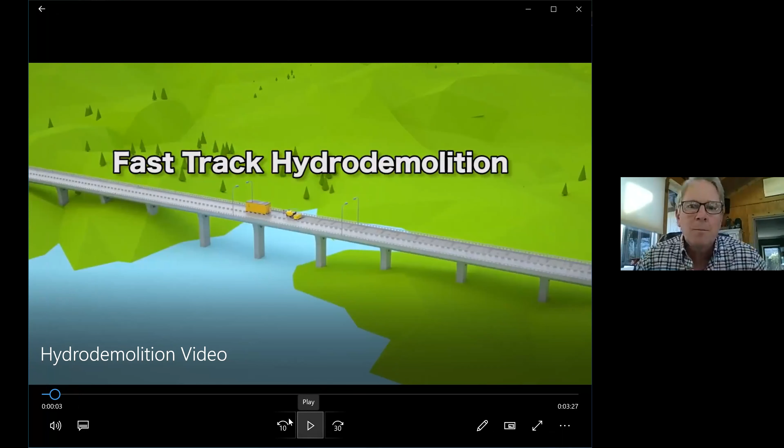Fast track hydrodemolition is a method used to prepare bridge decks for new latex modified concrete overlays. A bridge deck can be prepared quickly, cost effectively, and the high strength bond achieved between the existing deck and the new LMC overlay will assure a 25-year repair.

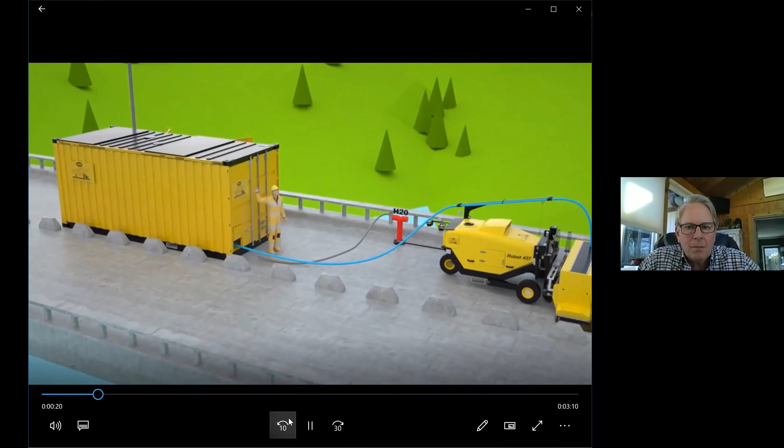On a typical bridge deck work site, you'll see a hydrodemolition pump unit where the water is pressurized and flow rates are controlled, and a hydrodemolition robot where a powerful water jet is controlled and safely operated. A potable water source from a water tanker or directly from a hydrant is attached to the pump unit.

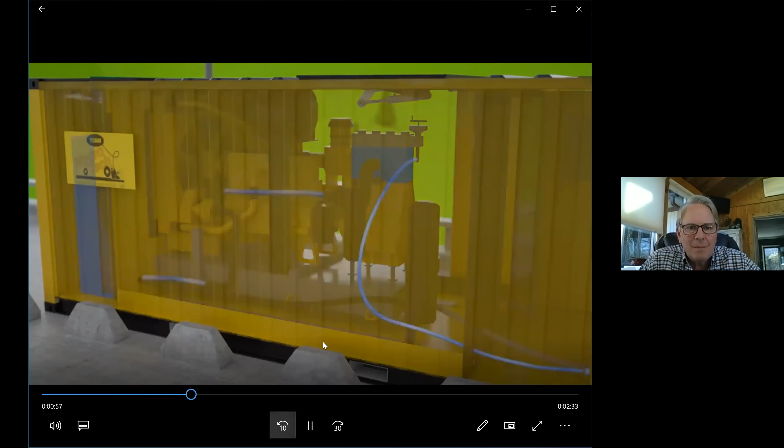Inside the pump unit, the water is pressurized between 13,000 and 20,000 psi, the ideal pressure range for selective removal, where deteriorated concrete is selectively removed from the structural deck slab without disturbing the sound concrete remaining. The pressurized water is then delivered through high-pressure hoses to the hydrodemolition robot, where the water jet releases from the nozzle and impacts the bridge deck surface.

The lateral movements of the water jet and the forward movements of the robot are computer-controlled. Inside the cutting head, the water jet oscillates back and forth and impacts the concrete deck, causing no impact vibration or micro-cracking. The precise mechanical movements of the hydrodemolition robot ensure that every square foot of the concrete surface receives exactly the same water jet energy exposure time.

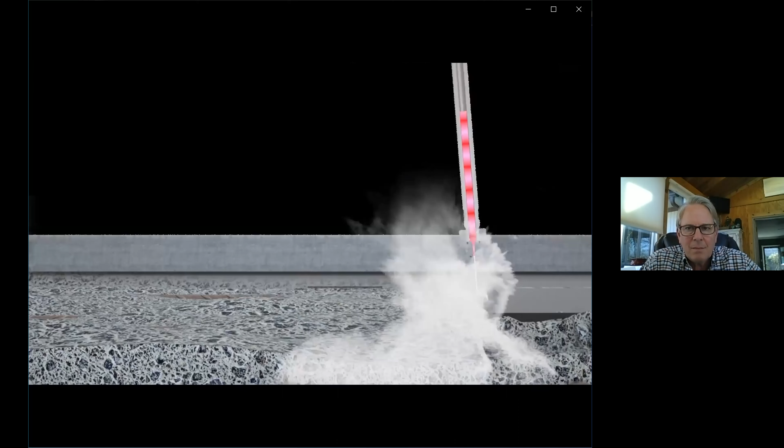The water jet is calibrated for lateral movements, forward movements, pressure and flow rate to achieve selective removal of all bad concrete in the deck, while leaving a bondable surface for the new LMC overlay, all during one pass of the robot. The water jet attacks cracks and pores in the deck surface and essentially washes away weakened concrete.

With fast-track hydrodemolition, you're not removing concrete for depth, you're using it only to selectively remove deteriorated concrete while leaving a rough and bondable surface.

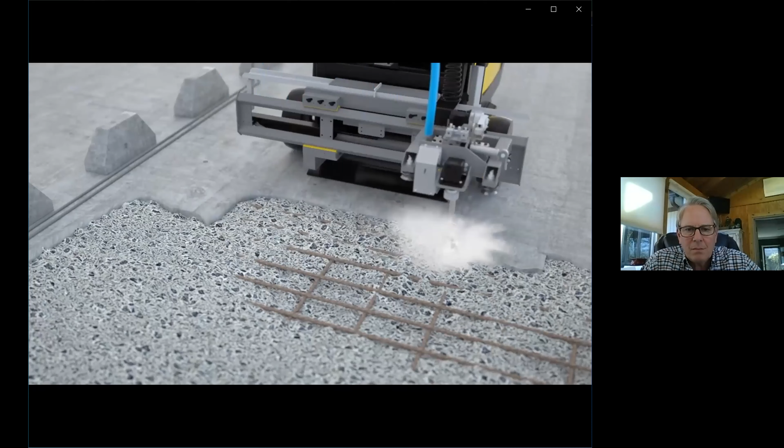Hydrodemolition replaces the need for jackhammering to remove deteriorated concrete from bridge decks. Jackhammers cause damage to the existing deck slab and to existing rebars in the deck. This will affect the bond interface of a new overlay and will greatly reduce the service life of the overlay.

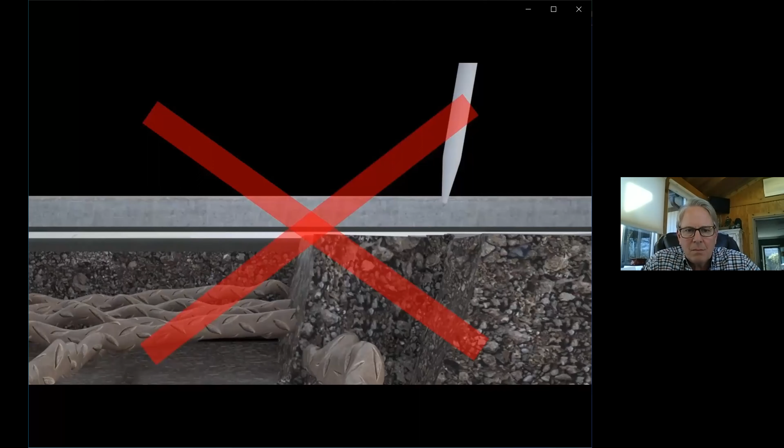With hydrodemolition, there are no fractures left behind, plus a great bond and selective removal of deteriorated concrete is achieved in 75% less time. Modern hydrodemolition equipment is remote controlled, highly productive, and extremely precise.

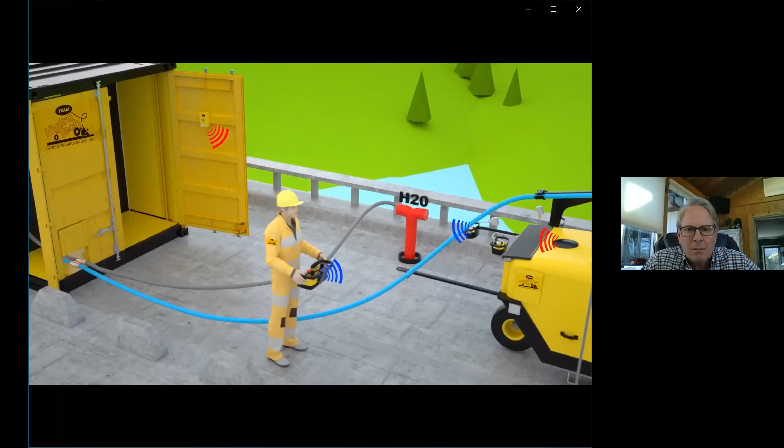Safety is our number one concern. The pumps can be shut down from numerous locations throughout the system.

Fast-track hydrodemolition continues to be the preferred choice to prepare a bridge deck for a new LMC concrete overlay. An entire bridge deck can be prepared in just one day. With a new LMC overlay, the bridge deck will last for 25 years of maintenance-free service life.

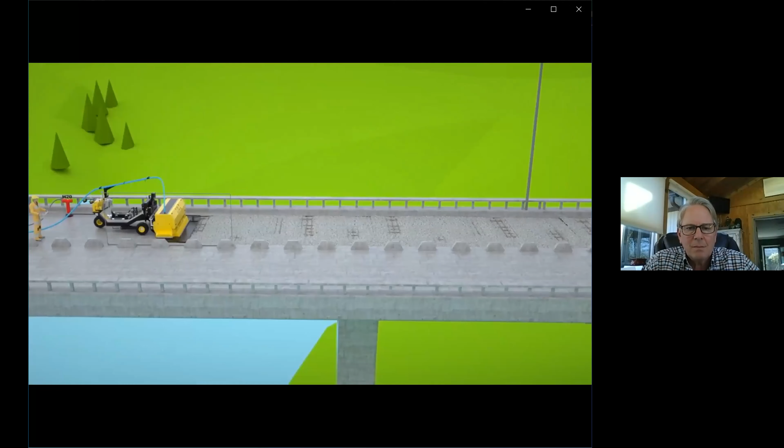There is no proven method better than the fast-track hydrodemolition, combined with a latex-modified concrete overlay, to repair bridge decks long-term. Please contact us for additional information and to discuss your bridge deck repair needs.

Okay, well, that gave you a good animated idea of how our hydrodemolition equipment works and attacks the bridge decks and selectively removes the bad concrete.

Now I'm going to go through and explain it through a PowerPoint and a lot of pictures. I like showing a lot of pictures when I present. I'm also going to mix in some of the really neat jobs we did over the last two years and talk a little bit about the Midwest and the work we've done in Oklahoma. I'll follow it up with maybe a short discussion on the concrete we use, and then include some of the research projects we've been involved with that have involved hydrodemolition or concrete overlays. So with that, I'm going to share my screen again and get started with my PowerPoint presentation.

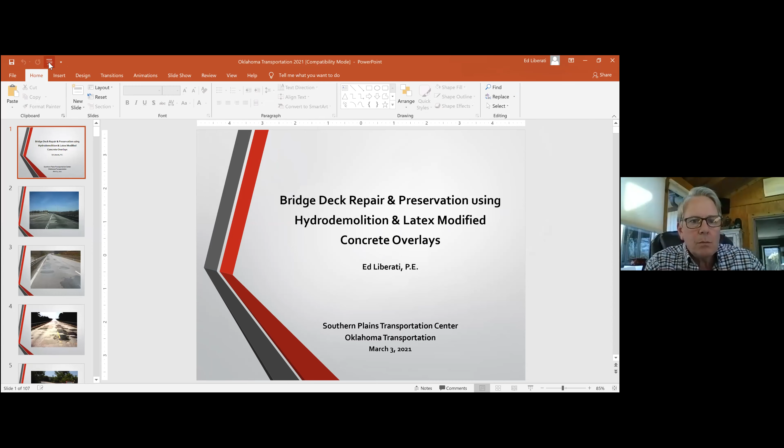There we go. All right, this is what happens to bridge decks 10, 20 years after.

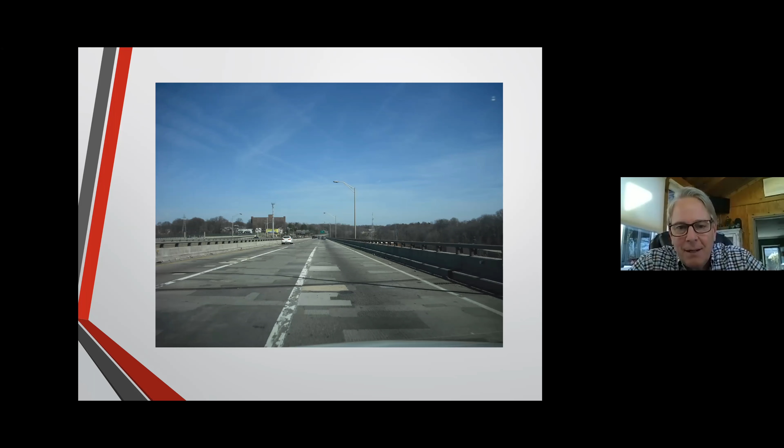In the Midwest, we use a lot of salt. We have heavy truck traffic now, freeze thaws. It causes the concrete to crack, and then the water gets in these cracks and it freezes and contracts and expands and causes potholes. And then the chlorides from the salt get into the steel, that causes rust to build up around the steel, and it also causes that to expand, and it causes pop outs also.

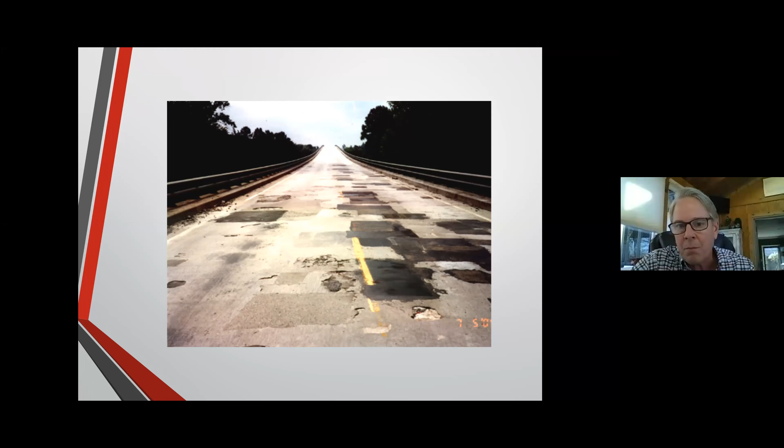So as you can see, bridge decks are built from the bottom up, but from the top down is kind of how they deteriorate. These are all bridges that, if they went much longer, you might have had to replace the whole bridge. But what we're in the business of is preserving bridge decks.

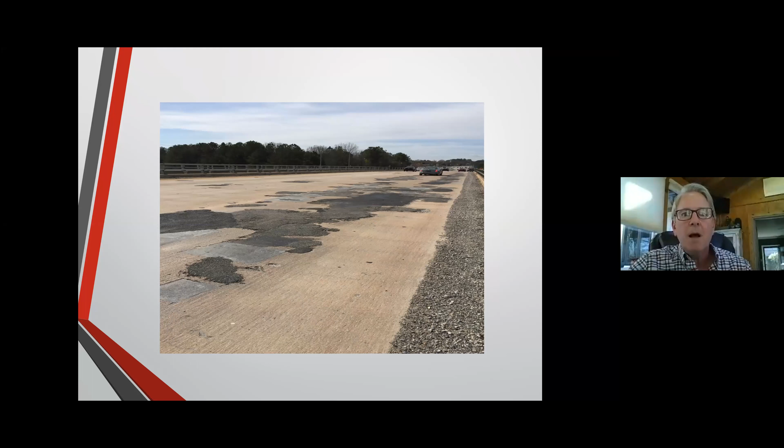There's one over in South Carolina we fixed. Bridge deck preservation, that's something that Walt said earlier that I presented at earlier this month, and it's what we all do. It's very cost effective to preserve bridges and fix them and make them last longer than it is to just build a bridge, let it go 25 years, and then have to build another bridge.

So our bridge preservation partnership really focuses on preservation of bridges, and that's exactly what we do. As a company, we prepare bridge decks and then install new concrete overlays on them. We've been doing this for almost 60 years now, so it's nothing new, but there's a lot more products out there and a lot more approaches to it.

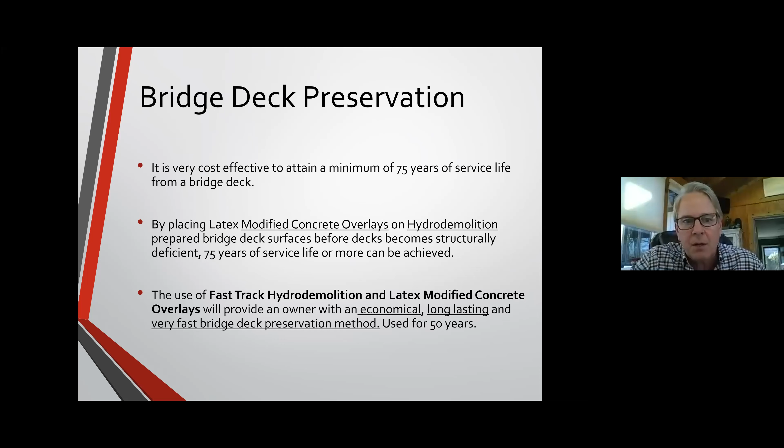But when bridges get into the condition of the slides I just shown, that's when you really need to get the hydrodemolition robots out there and the concrete overlays.

A couple of the strategies I've been involved with: when I was born in the 60s, there was a lot of interstate being built. In the 80s, that's when I was a young engineer. The first job I was ever on, they were doing a concrete overlay.

The bridge was about 20 years old when they put a latex overlay on it. That was the first time I ever saw hydrodemolition. I was 18 years old. Well, 25 years later, about 10 years ago, they put a second overlay on that bridge. So the bridge was built in the 60s, overlaid the first time in the 80s, and now it's been overlaid again in the 2000s.

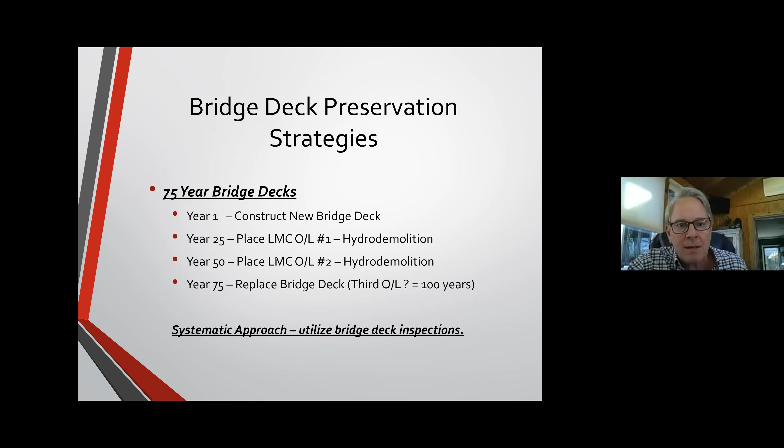Instead of replacing this whole bridge, we're preserving it. It's a systematic approach utilized by bridge inspection reports. You've got to get to these bridges at the right time and repair them. Otherwise they get too far along in deterioration and you have to replace them, which takes a lot of time and a lot of money.

So now I'm going to be talking all about hydrodemolition for the next half hour. It's a mechanical process, like you saw - it's all equipment that does the work. It replaces jackhammers. With that water jet, rapid erosion occurs. The jet attacks the cement matrix, pores, and cracks in the concrete - it doesn't cut the stone. It gets into these areas and blows them out, and that's how we can selectively remove the concrete.

We get out on every deck and calibrate these robots - the movements, the pressure, the flow rate through the machine, and the water jet exposure time. Once it's calibrated properly, we run it at those settings over the whole bridge, and what we achieve is selective removal.

The equipment, as you saw in the video, consists of the pump unit, the power unit, a hydrodemolition robot, and you did not see a vac truck, but you'll see how we clean up all the debris that's left on the deck.

We easily mobilize it to any project. We worked in 24 states last year, and the setup time's easy - we get on a job in an hour and we can be cutting.

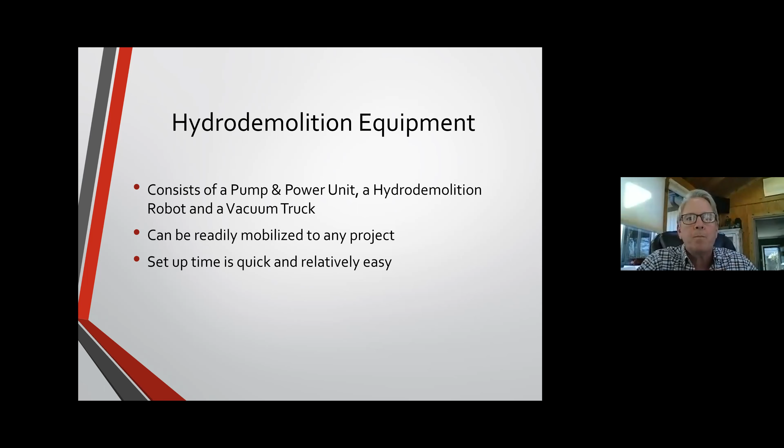The pump unit was the first one. As you saw, it received water from the water tankers or from a hydrant. It's the big power pack that filters and pressurizes the water, and supplies it to the units at 12,000 to 20,000 PSI, at a flow rate of about 55 gallons a minute, sometimes going up to 80 gallons a minute. It's called the selective settings, so that you get selective removal.

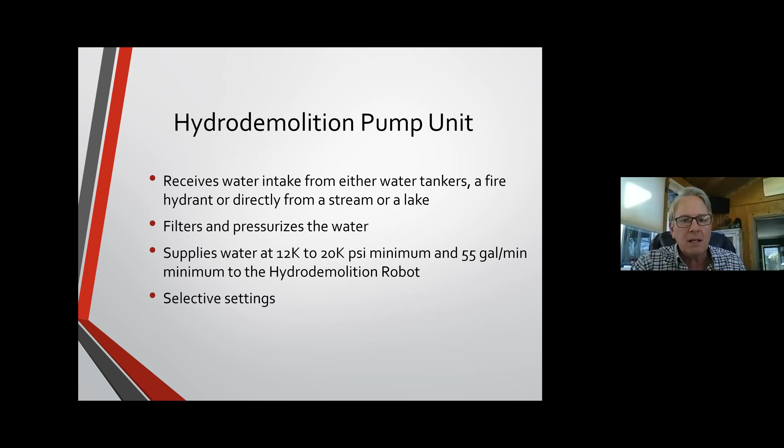On the video, it just showed a box. Well, we have to be able to get around, so we have that box up on a semi-truck, and that's how you drive it around. There's a water tanker supplying it.

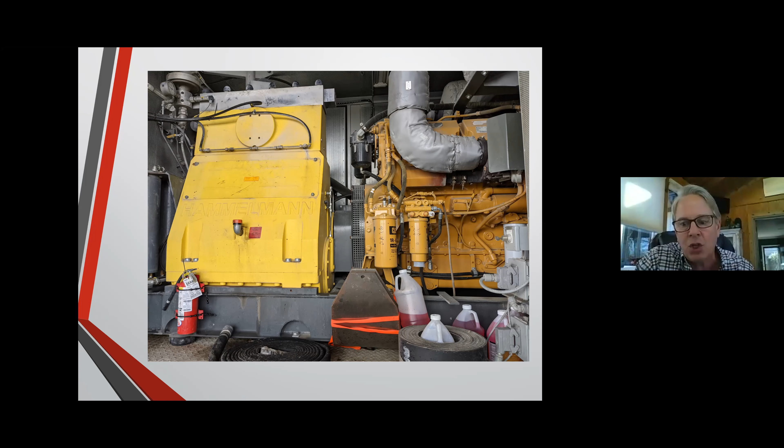Inside the box, you can see a Cat diesel engine here - that's a 1,000 horsepower engine. It connects to the Hammelmann pumps on the left, a 5-cylinder pump. So there's 5 pistons in there spinning, kind of like a gas or diesel engine, but these are creating pressure and flow rate. All that horsepower from that engine, all that energy gets transferred into the pumps, which gets transferred into the water, which hits the deck. That's how the power is generated into the stream.

The robot's a neat piece of equipment - it's computerized and self-propelled. As you saw, the jet, all that water, is coming through a quarter-inch jet nozzle, and there are controls on it that allow us to adjust how much it steps up each time, how much pressure, how much flow rate. We can control a whole lot of things, and from a safety standpoint, we have switches that can shut everything down just at the press of a button.

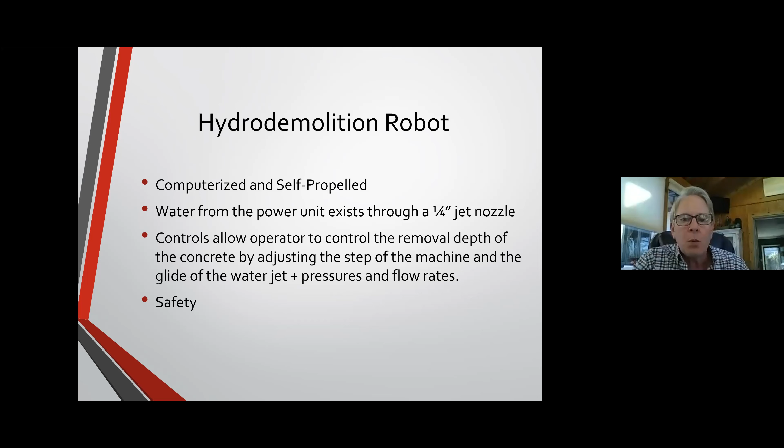And here we are working with one of our Triton robots on a bridge that had fire damage in Kentucky. If you look up the Brent Spence Bridge, Google it, and search 2020 fire, it's quite amazing. A truck wrecked on this bridge right in the middle, and it did a lot of damage, but they got it all fixed in like a month. It was quite an amazing achievement by the Kentucky DOT, but that was a heck of a fire.

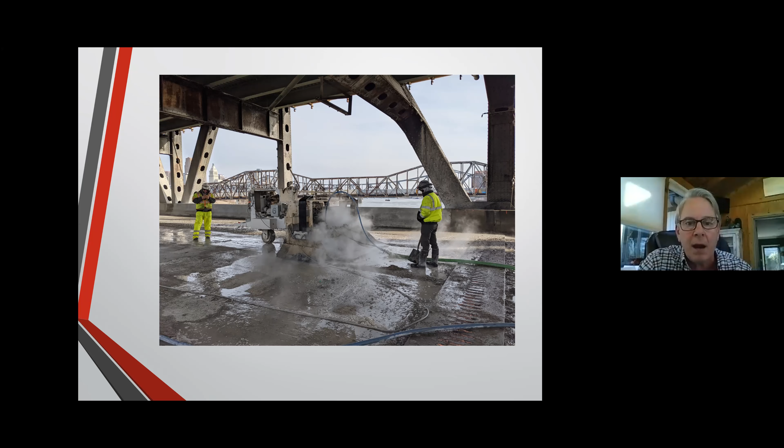We just did that in December of last year. Big double-decker bridge. The fire, you could see the fire damage above. The wreck happened on the bottom of the bridge and torched the top really badly.

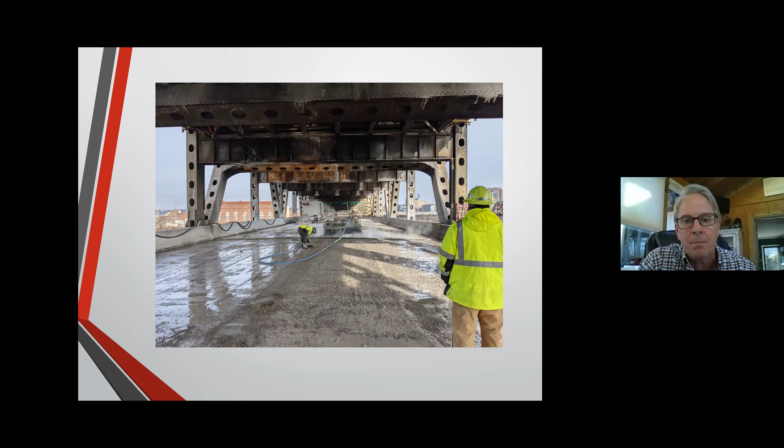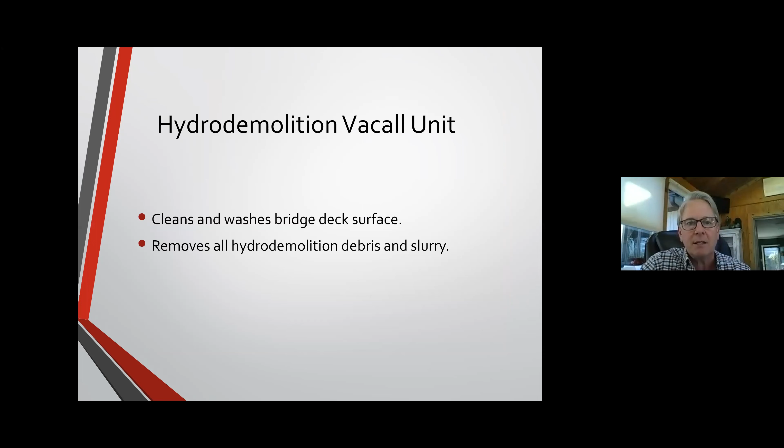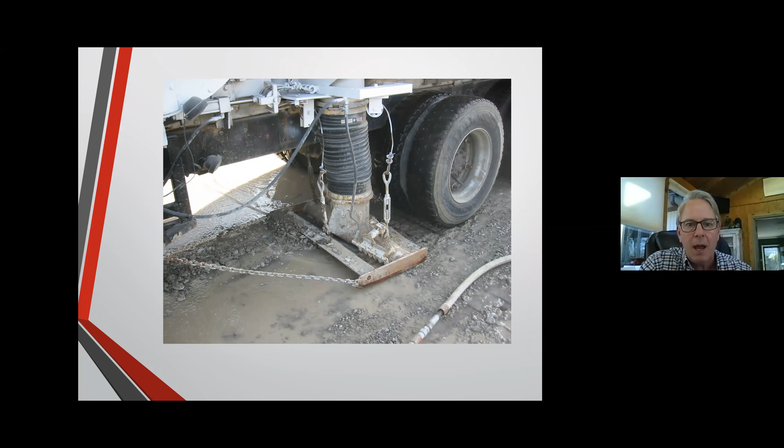The Vacall unit is how we clean these decks. You can see it drives on the decks. It's got a slide, it's got water jets, and it sucks up all that debris and water into a watertight container. You can see it gets very clean, because you got to have it very clean when you're putting a new concrete overlay, since the bond is so important. You have to have a long-term bond. It can't debond before 25 years, or we would feel that we failed, that's for sure.

Another way of cleaning, when we're doing deep cut hydrodemolition, you can't drive on it with the vac truck, so you have to use the vacuum tube unit and hose. It's just a lot slower, but I'll explain deep cut hydrodemolition more in detail.

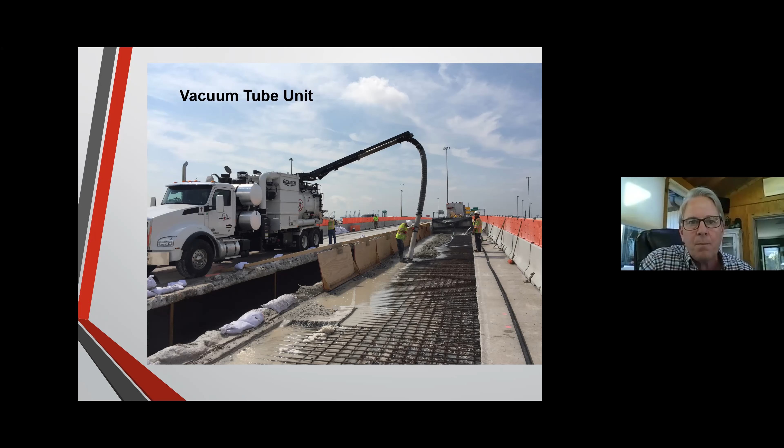So the applications for hydrodemolition - I'm going to talk about fast track hydrodemolition, which is what the video was about, and that's how you prepare for latex overlays. These are to get the jobs done really fast. But then there's deep cut hydrodemolition I'm going to discuss, and then some other applications I'm going to show you - vertical hydrodemolition and some other ones.

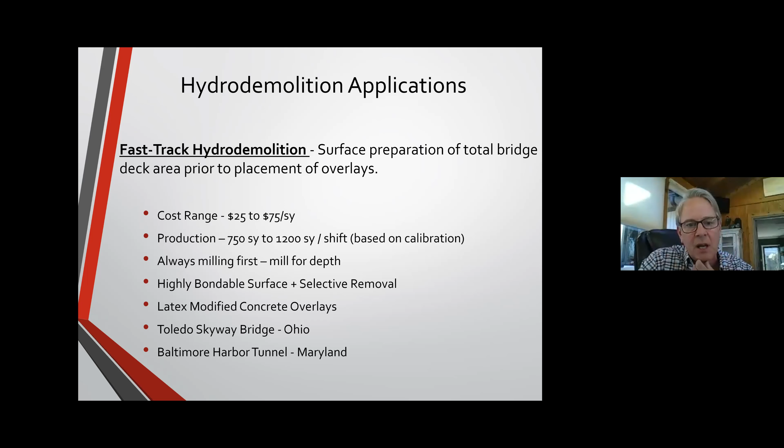I'm going to use 2 jobs that we just did last year - one of them we're going to continue to finish this year - the Toledo Skyway Bridge in Ohio and the Baltimore Harbor Tunnel in Maryland. This bridge in Ohio is a beautiful bridge, about 15 years old, and the new surface was starting to get a little scaly and get some cracks, so Ohio DOT decided they wanted to put a new latex overlay on it.

So there we are on day 1. We ran - they wanted to get this done fast, so they called for 2 hydrodemolition units working at one time, 2 vac trucks behind there working.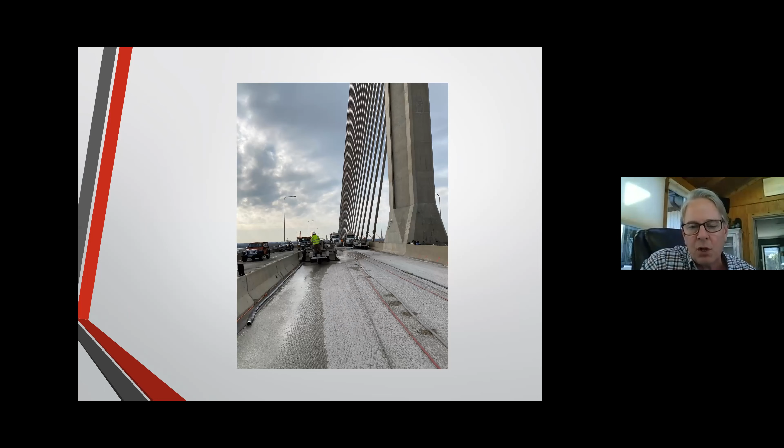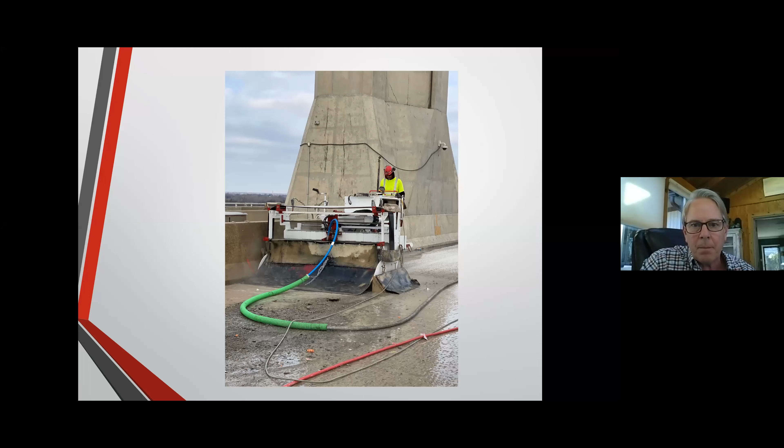You can see we start at the middle of the bridge because that's the highest point. That way the water falls away from you, so as you clean, it stays cleaner. You can see we've worked our way down from the middle now. There's one of our robots getting ready to start up, and there's the surface you get - that rough, bondable surface. This deck wasn't very old, so there wasn't a lot of bad concrete in it, but they wanted that rough surface for the new latex overlay to adhere.

You could just see the job was 137,000 square yards. It was the biggest job Ohio ever let.

So with all that water, it runs from the top to the bottom. We can't dispose of this in rivers or sewers. You have to contain it, collect it, categorize it, treat it, and legally dispose of it.

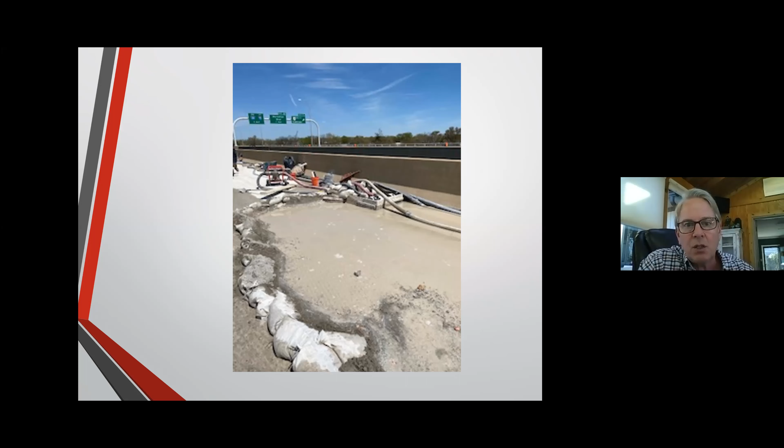So what we do is install tanks underneath - that's just another picture of us collecting the water. We're able to collect this water in these tanks. From here, we can send it through filters if we want, and we could add acids, such as citric acid or muriatic acid we use, or sodium bisulfate, because the pH goes up pretty high. If the pH is around 7, neutral, when we get the water after we cut, it goes up to about a 10 or 11.

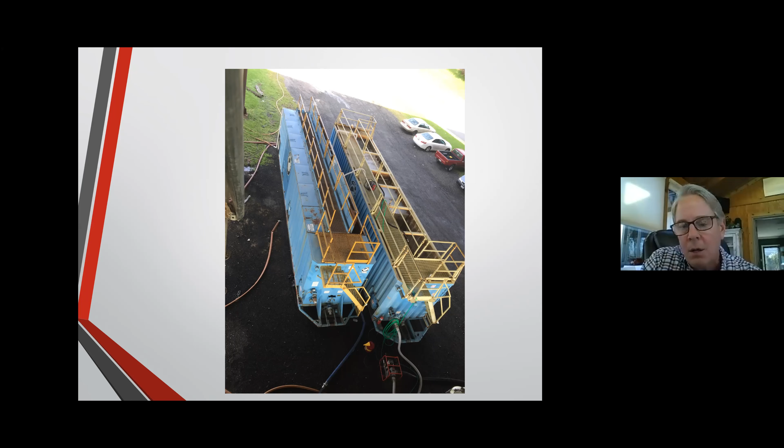A lot of the sewer departments don't want that high pH, so you have to add acids to neutralize it. So with almost every job now, we have to have a water treatment system on if it's a real big job. If they're small jobs, we'll collect the water, but there's a water control plan that goes with every job. There's a top view where you can see we put the dirty water in a weir where we do filtration of the water to get the suspended solids out.

Then we ran the water through our filtration and pH adjustment unit. And then the 2 tanks on the top, we put it back where the clean water was. On this job, we didn't want to dispose of all this water, so we recycled it. We're able to get it clean enough to reuse it again.

The next job I want to show you about for fast track hydrodemolition is the Baltimore Harbor Tunnel. This is a heck of a structure. If you want to get online and Google how this thing was built, it's amazing. They built these big steel units, dredged, and submerged them down. I never heard of a tunnel being built like that. I always thought they were bored.

This one was floated out into the harbor, filled with water and dropped, and then those guys got in there and dewatered them and welded it together. Quite amazing. But after years, there's 2 tubes, as you can see, a northbound and a southbound.

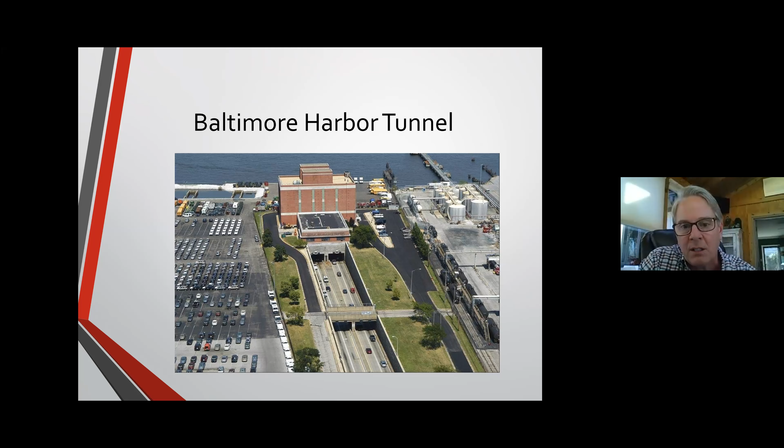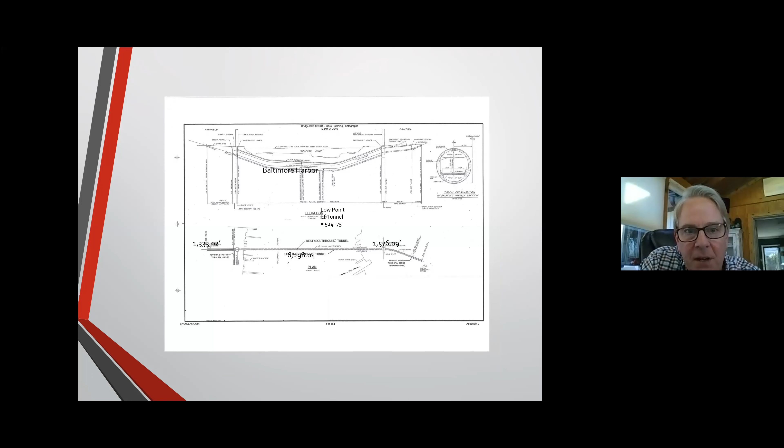This is kind of a schematic of the tunnel. This thing is over 8,000 feet long. And on the next slide, you can see it's twin tubes. Those are all steel, then they completely line with concrete. But you can see at the bottom, that's the roadway surface, and that's what was deteriorating very, very badly.

So Maryland Transportation Authority said, we got to fix this. We can't replace all that. So they came up with hydrodemolition and a latex overlay. You can see this is the approach. We're doing phase 2 of the northbound tunnel. On the right, you can see the latex overlay is already completed. On the left is where we're working now.

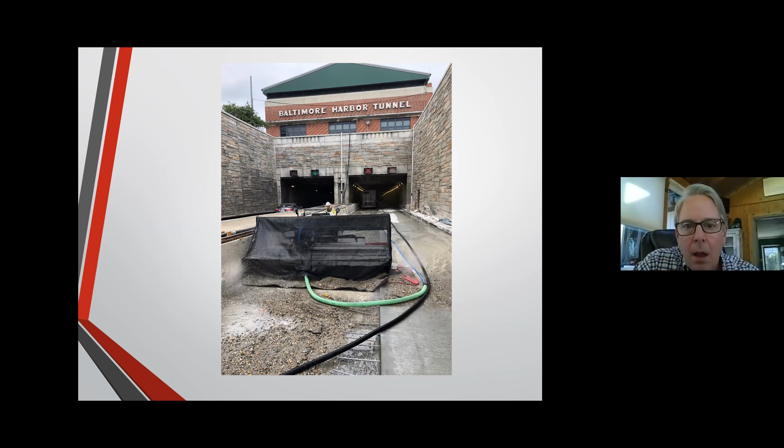The hydrodemolition units we made, we actually designed these ones to be 11 foot wide because the cuts were 11 foot. We couldn't back up. Very tight work areas, not just from construction but from vehicular traffic. Construction traffic had to be able to get by us because there was a lot of activity going on.

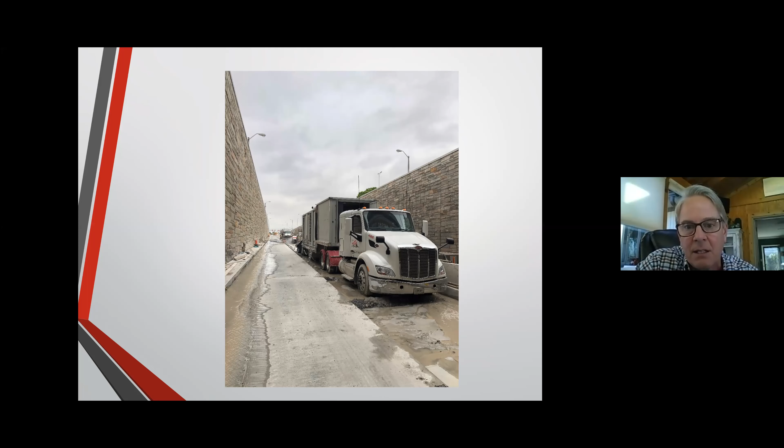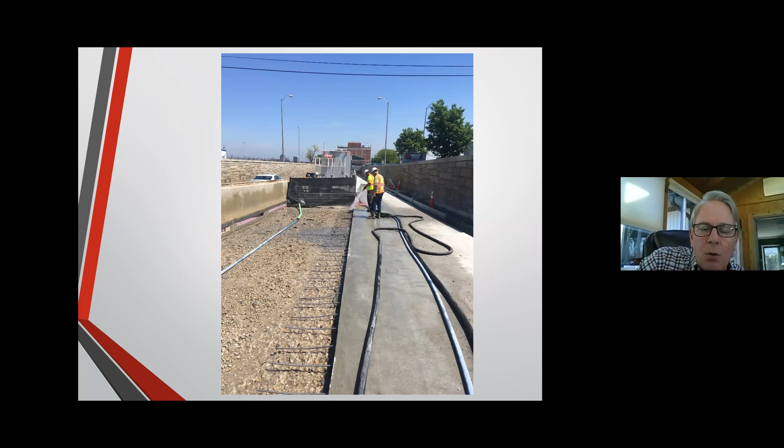Oh, you can see they painted our unit up. The guys had some fun and put some decals on this one. But you can just see how it was working. And now we're finishing the approach, so we're entering into the tunnel. There's the vac trucks working.

And inside the tunnel, I'll tell you what, you want to talk about amplification of sound. When this equipment works inside of a tunnel, it gets so loud. The guys couldn't just put regular earplugs in. We had to buy them these $700 pieces to protect their ears. Very loud, very tight quarters, and lots of water.

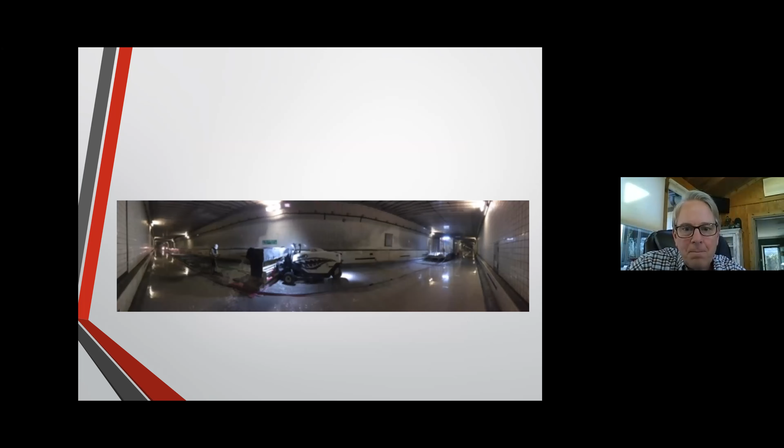There's a panoramic view you can see where the pump units on the right, the hydro units in the middle, and the vac trucks on the left. Look at all the debris we have to clean up. It's amazing what we do, but we had to clean up.

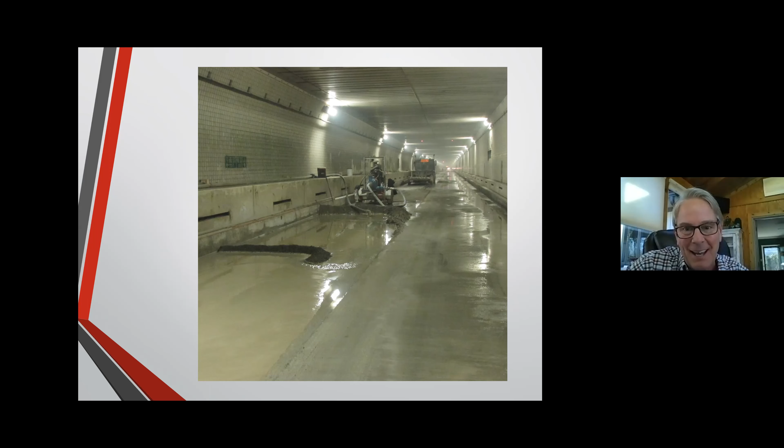And then at the very low end of the tunnel, you can see where all this water ended up. Well, we had to get a big pump. This was a 6-inch centrifugal pump, diesel powered, and we pumped it back out of the tunnel over 3,000 feet. We pumped it up to our system here that we set up at the top of the tunnel. So you have to get water into the tunnel, you've got to pump it all back out, clean it, and then legally dispose of it.

So there's a lot of engineering that goes into these jobs. It's really, really amazing. And with the surface, it's a very fast way of doing it. We're going to selectively remove concrete, which leaves a very rough and bondable surface. It reduces the chloride concentrations on the deck.

It's got a lot of bondable area, and we don't cut the steel. It actually cleans the steel, and it makes it look like the day it was put in. It's really amazing how nicely it cleans it.

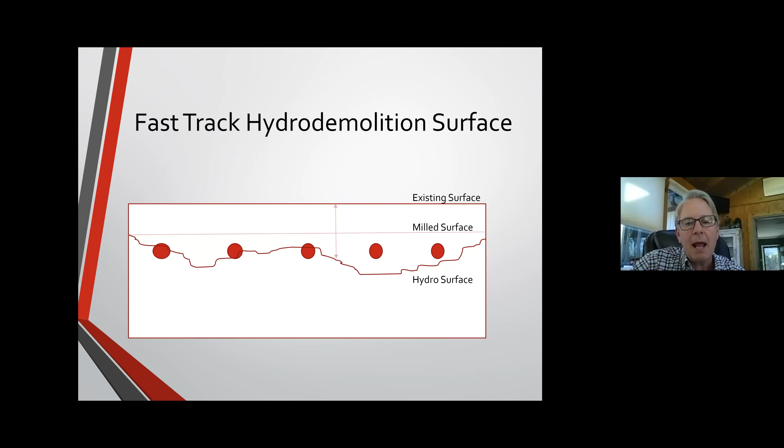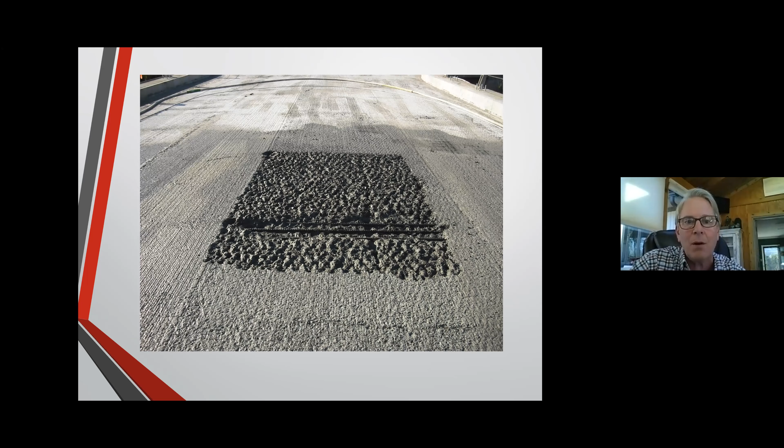There's a schematic of a fast track surface, and there's a calibration area. That's when, before you get started, you do some test areas. Your goal is to have it rough and bondable, but to selectively take the bad out and clean that rebar. Look how clean that rebar is. You go from all this debris to clean, and there's that picture again showing the selective removal.

I don't know if you guys have ever been on a job, but before hydrodemolition, they would go out with chains and drag them on the deck after it was milled, then spray paint these areas, and the guys would jackhammer. You'd continue to do that until you got all the bad out of the deck. Well, with hydro, you can do this whole deck in one day, where it might take a week or two jackhammering and sounding. Plus, you don't have the micro fractures.

You get the bondable surface. It just really makes your new concrete overlay last a lot longer on a hydro surface.

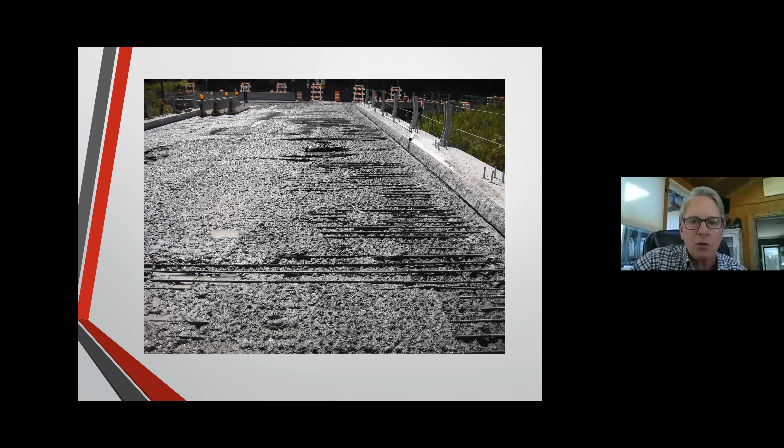In 2020, they let a really nice job, the Pensacola Dam project, and it was 14,500 square yards of hydro and latex. It's going on right now, I believe. Unfortunately, we weren't the low bidder on that one, or I would have definitely highlighted this job. But is there anything you want to say about that job, Walt?

No, I just think we're getting a really good overlay, and very pleased with what we got.

Oklahoma's just been a leader in bridge deck preservation, making what they have last and trying to make their funds go further, just like everybody is. Michigan and Iowa are two more that have done it, and that's all part of the Midwest group that Walt and I are a member of, some of the states there.

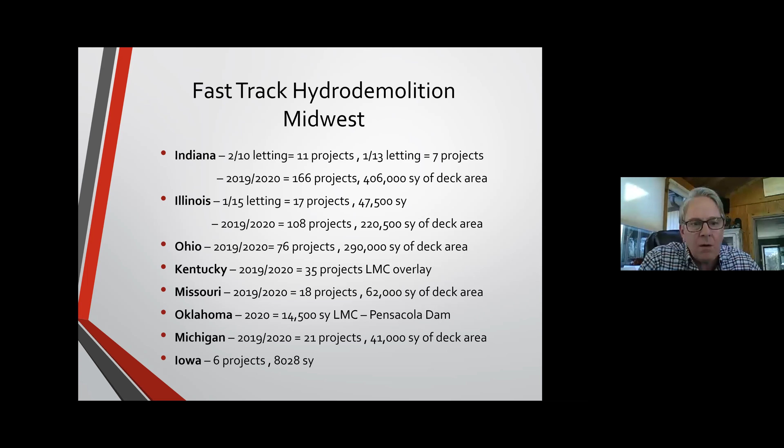So now I'm going to talk about a second application, the deep cut hydrodemolition. This is used where states feel they have too much chlorides in their deck. They want to get below the rebar mat to ensure they're getting all of the chlorides out so it doesn't cause deterioration on your rebar. It costs more per square yard, and the production is a lot less than the fast track hydro.

I'm going to use a job we just finished last year over in Rhode Island, the Newport Bridge. This is another beautiful suspension bridge over the ocean that runs from the mainland to Newport Island. It's just beautiful up there.

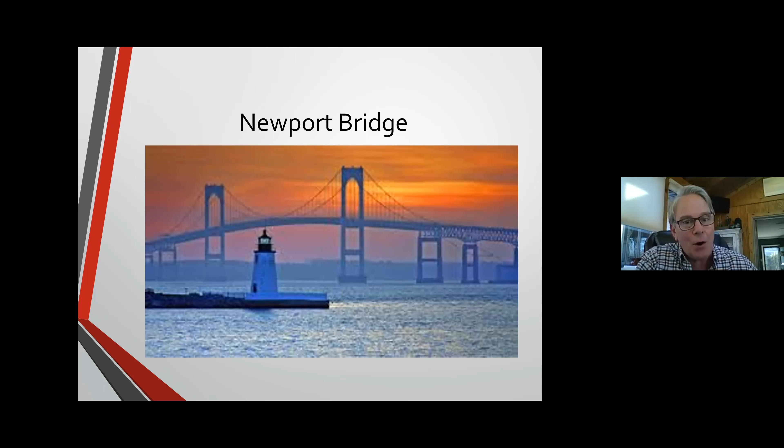We only did half of the bridge, and I guess they're going to try to do the other half as soon as they get money again. They charge $5 a car, so there's a lot of cars, so I'm sure we'll be out there sometime in the next few years. You could just see this deck, how much patching they did on it over the years. There's so much traffic during tourist season that they were very sensitive to that.

Work had to be done at night. You had to move barrier daily. You could see all that barrier on the left, movable concrete barrier, so that they had 2 lanes coming into the island during the day and 2 lanes going out. That's how we had to do the construction.

Because of that, it took us 2 years to do this job, where if we could have had the whole bridge, we could have done it in one construction season. But maintaining traffic, keeping your tourists happy, keeping your politicians happy, that's why we have to spend a lot of extra money to fix bridges in phases.

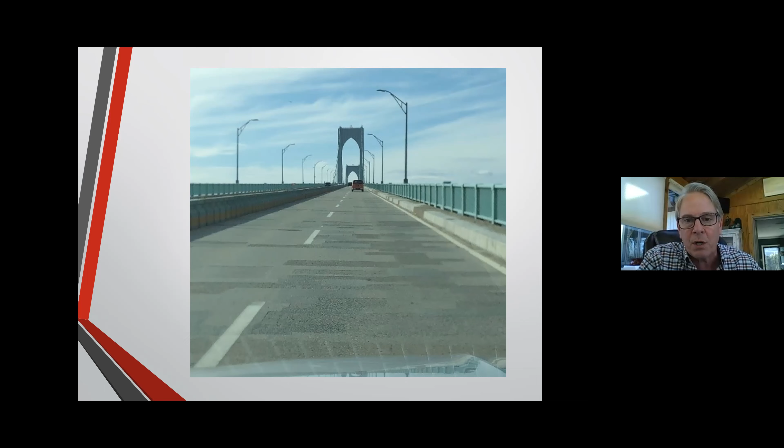So this was another big suspension bridge, very tight work areas. Like I said, it's the deep cut hydrodemolition, and that's where we have to use the suck tube there, and hosing to get it clean.

You can't run those vac trucks on this kind of steel because it would bend them, yield them, and weaken the bar. So you have to do it all by hand.

You can see how tight that work area is. We had traffic on our left, traffic on our right, and we were right in the middle of it. But there's the final surface.

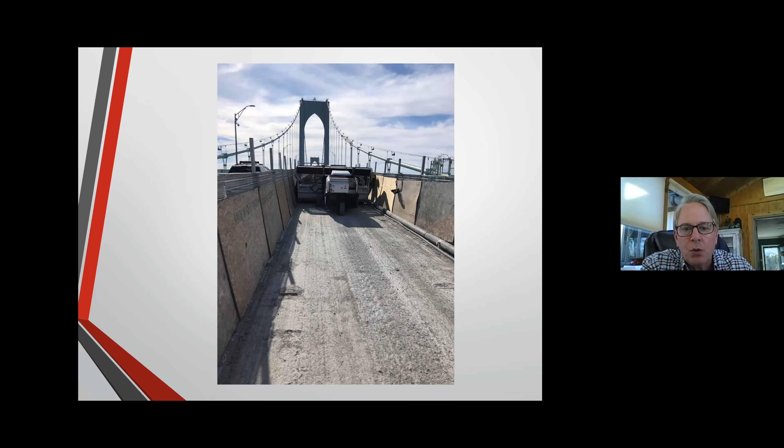You slow the machine down, and it cuts deeper, and it doesn't damage the steel. This is what the owner wanted here. Instead of putting a 1.5 inch concrete latex overlay on, he put a 4-inch structural concrete overlay on, bonded to

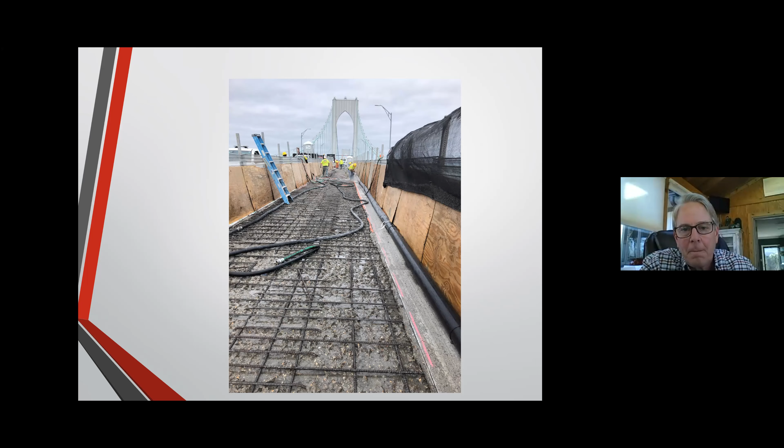the top mat of bar, while leaving the existing concrete underneath. You can see it's still a very bondable surface, but he wanted every bit of that rebar exposed. You can see some of the marks.

They had to have a little bit of jackhammer work after we were done, but very, very minimal. We had to do all the cleanup, extra cleanup at night. So just beautiful skies there.

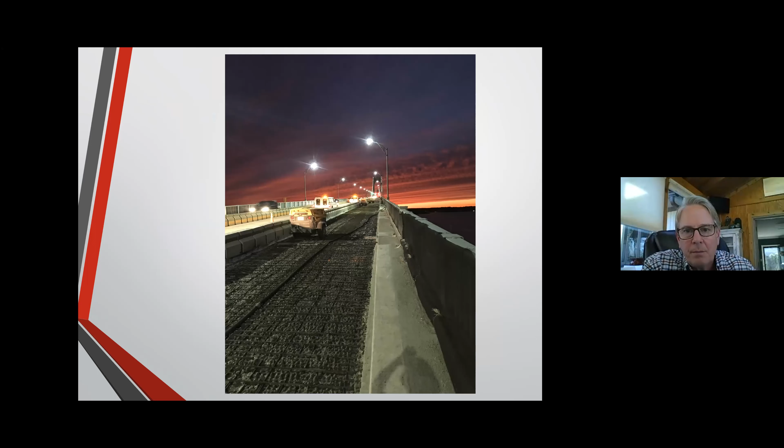On this job, we actually were able to set up our water control system over a pier on the bridge outside of the work area. And we took the water and we recycled it, every bit of it on here.

At the end of each phase, we use millions of gallons of water on this job for cleanup and for hydro, but there were 4 phases. At the end of each phase, I only had 20,000 gallons to dispose of. So that saves a lot of money when there's nowhere to put it. We're over the ocean, so it would have all had to be trucked away. So I said, let's recycle this one.

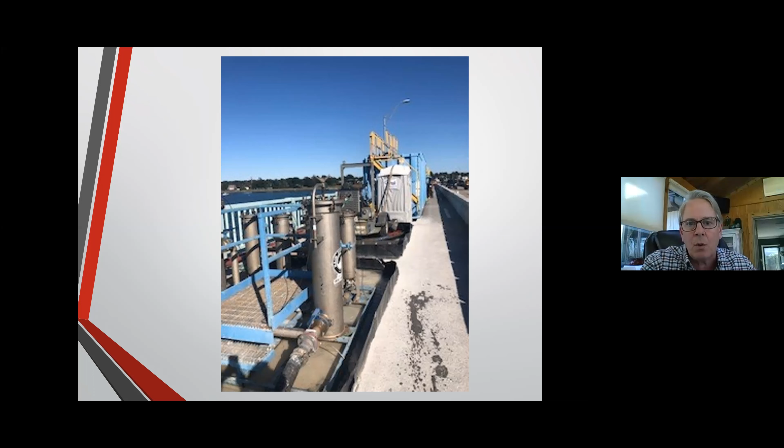Just another picture of the recycle operation. And then here's some of the less common applications, but where we have used hydrodemolition, patching bridge decks. Some of these, New Jersey next week's got like 40,000 square yards of patching, and guys running jackhammers, it's just becoming less and less common because the silica dust standards are hard to adhere to.

These guys have to wear masks. You have to use water. It makes a mess. And hydrodemolition is starting to get used a lot more for patching, only on big jobs. It has to be a good sized job.

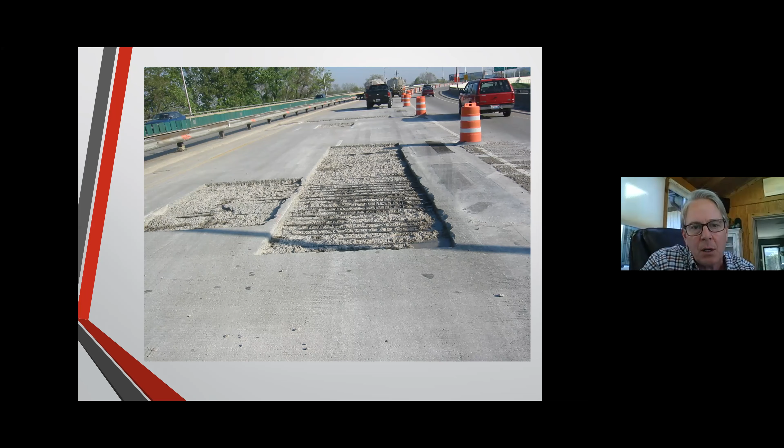Full depth removals. Sometimes the owner wants the deck taken out full depth in certain areas and replaced. Well, if you try to jackhammer all this, you'd be there for a month.

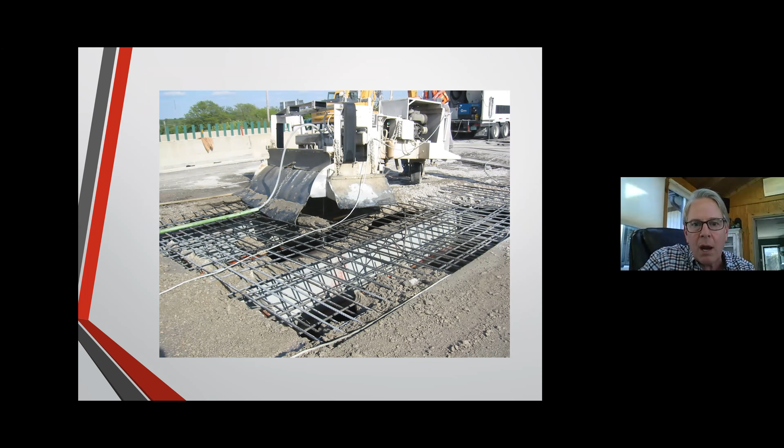So we're able to, he marked out these areas and we're able to blow all the concrete below, catch the concrete without damaging anything below, catch all the water, legally dispose of it, don't get the EPA upset, and we don't damage any of the rebar. And they were able to put that deck back, those really bad areas, bad pours that they had.

Like a lot of expansion joints get removed. Well, that's all jackhammer work. This contractor asked us to do it with hydrodemolition.

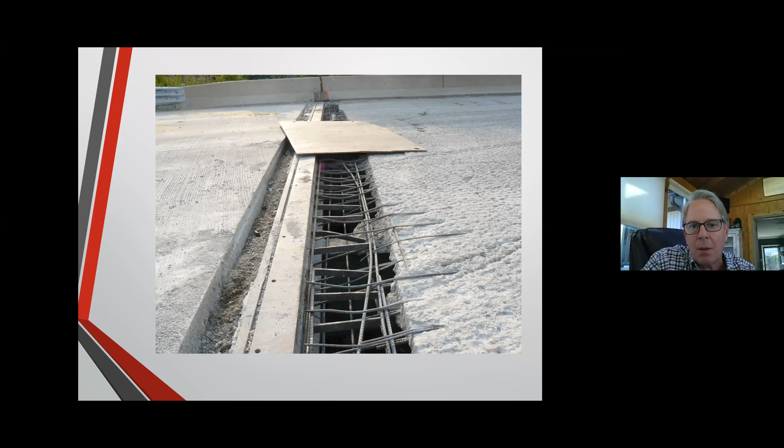This is cutting, I call it slotting. We cut over existing beams that have connectors on it. I don't know if you could see my pointer there, but there are some connectors you could see.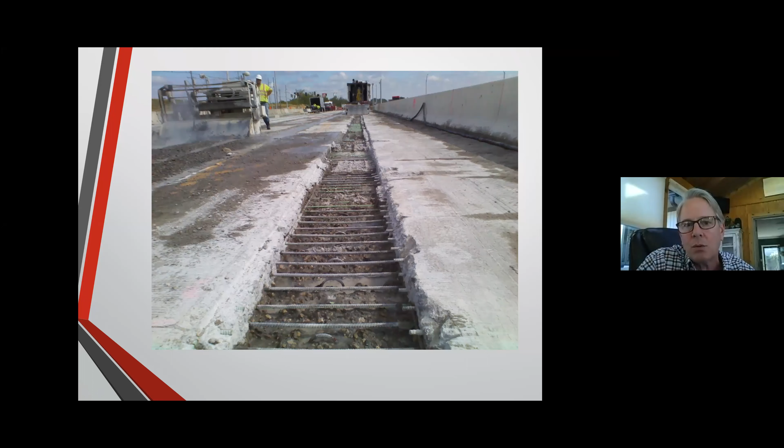Well, they're replacing this deck. All that concrete above the beams would have had to be jackhammered, and we were able to do it with hydro. And it's the same with steel beams that have steel stud connectors on the tops if you replace the deck. Vertical hydrodemolition, we do that also.

You can see we prepared the face of that wall for a new surface instead of taking everything down and replacing it. Lot cheaper. They called for all this patching on these piers.

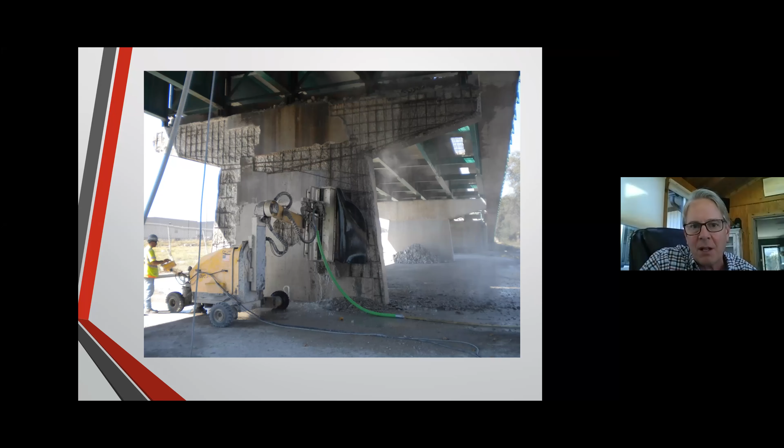There were 50 of them. We went in and did it all with hydrodemolition instead of jackhammering. Here's a big turn back wing wall that they had a bunch of patching on. We got in there and did it with the hydro. We did the face of the abutments.

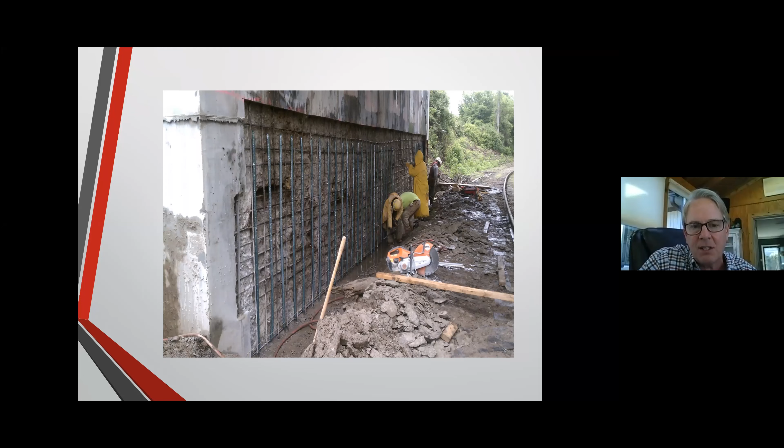That's all I had to talk about on the hydrodemolition side right now, other than the research stuff. But I wanted to briefly touch on the latex concrete mix design.

This is the topping that we use and that they're using on the Pensacola Dam. It's a standard concrete mix. You've got your fine aggregates, sand, your coarse aggregates. We use a smaller size stone, not the 1-inch stones, more like half inch, because you want them to get under the bars if you do have bar exposure.

Cement, 7 bags of cement, so it's a very strong mix. It'll achieve 4,500 PSI in 7 days. This is what makes it the modified concrete. They add latex emulsion to it, 24 gallons per cubic yard. I'll talk more about that on the next slides. And there's the water.

The air you're going to end up with is about 7%, and a 4 to 6 inch slump. Again, we sell 3 types of cement. If we use the type 1 cement latex mix, that requires a 4-day cure. I believe that's what they're using on the Pensacola Dam. If you use the type 3 cement for the 7 bags, 658 pounds per cubic yard, you can reduce the cure to 2 days.

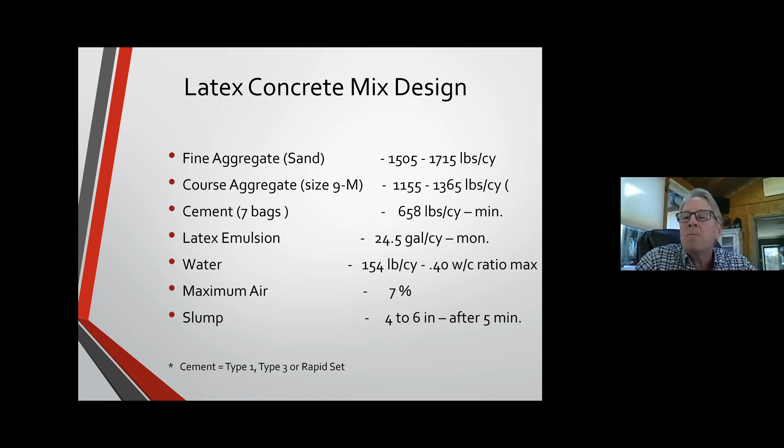Okay, that latex emulsion I talked about, 24.5 gallons per cubic yard. It's a suspension of very tiny styrene butadiene polymer particles in water, typically about 50% polymer, 50% water. These little polymers are very well known for their hydrophobicity, or excellent water resistance.

These things, when they're introduced into the concrete mix, this 24.5 gallons, and it's mixed all together in the mobile mixer, I'll talk about those, these particles fuse together. They stick, they're very sticky. If you get this stuff on your pants or boots, you can't get it off. They stick to the stone, the coarse aggregate, the fine aggregate, and then when it hits the deck it sticks there, and they form this web throughout the concrete.

Essentially it waterproofs the concrete. The concrete, as it goes from its liquid to its solid state, all the water is escaping. We want to control that because you don't want to end up with shrinkage cracking. You do that by wet curing. But as all that water escapes, all of these polymer particles are left in the concrete, and it makes it waterproof too. So that's what makes it really good as an overlay material, because it sticks to the deck real good. It gives you that chemical bond, and then it doesn't let any chlorides through it. It essentially waterproofs the deck.

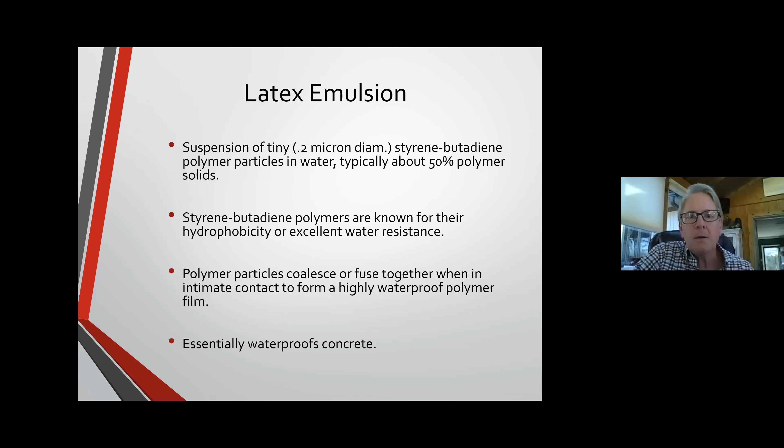I might have stuck something in here out of order, but the equipment - it's not made in a ready mix concrete truck. It's made in a volumetric mixer because it's so sticky. If you put it in a roto mixer at a batch plant, it would be stuck to the drum so bad. And it's placed with a Bidwell type finish machine.

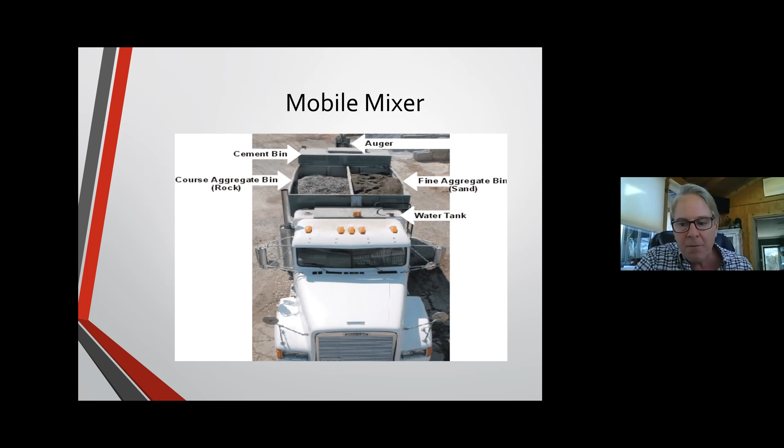You can see here the mobile mixer. It's like a mobile batch plant. You have a bin for your coarse aggregate, a bin for your fine aggregate, a bin for your water, a bin for your cement, and a bin for your latex emulsion, all separate.

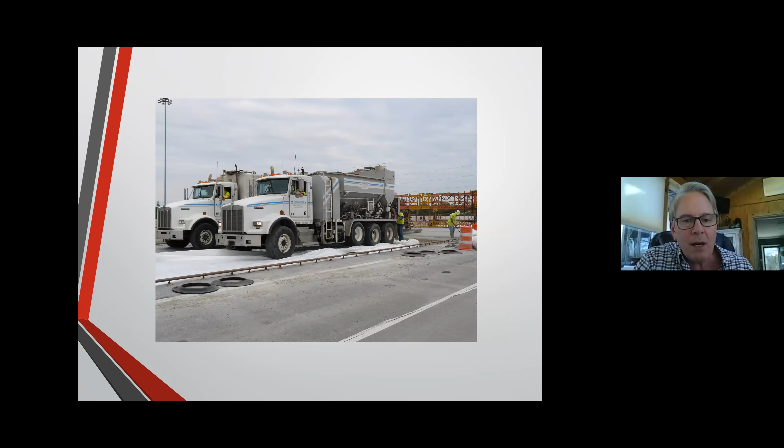And here's one of our trucks pulling onto a deck, getting ready to pour. What's great is these are accurately calibrated. They produce fresh concrete, it's all mixed. It drops into the auger, works its way upward and is mixed in that auger, and then it's placed onto the deck, directly onto the hydro surface. You can see here the finish machine is finishing it to the grade and profile of the deck.

And that's going to give you your final riding surface. This one's being done at night because we want low evaporation when we pour this. We don't want shrinkage cracking.

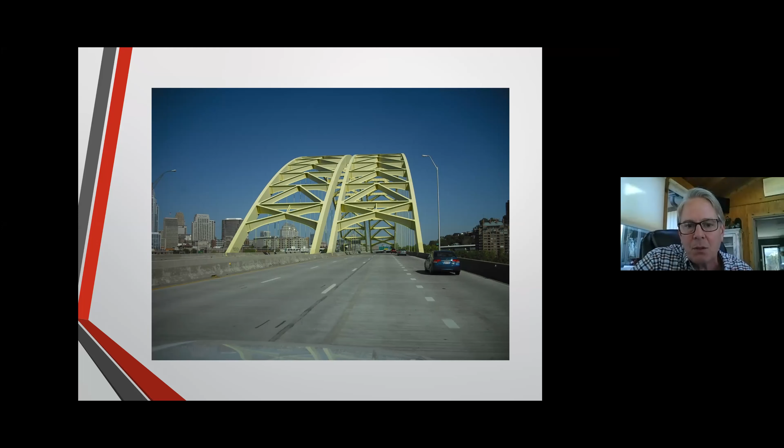Here's a finished deck over in Ohio, going over the Ohio River. It was in pretty poor shape, but we put a new latex overlay on it about 10 years ago. I drove over it probably about a month ago, and it still looks great. Those latex overlays really, really hold up.

My last slides, I'm going to conclude with, I was asked to talk about some of our research. This 1988 was really an amazing research. It was done in Sweden, and that's kind of who invented hydrodemolition. They determined what the optimum settings were for pressure and flow rates to achieve the selective removal. It's a really interesting report.

The National Research Council in 1992 did a really interesting report on the techniques for concrete removal and bar cleaning on bridge rehabilitation projects. They go into a lot of hydrodemolition there.

I can't see the date there, 2020. Successful, the National Cooperative Highway Research Program - I think Walt might have been a part of this, I'm sure he was. This was done by all the states last year. They did a really in-depth study, got a bunch of people together, a bunch of states to share. It's kind of funny, every state's got their own ideas on bridge preservation. I know our bridge preservation partnership really tries to make everybody pick the best things that everyone's doing and try to use those.

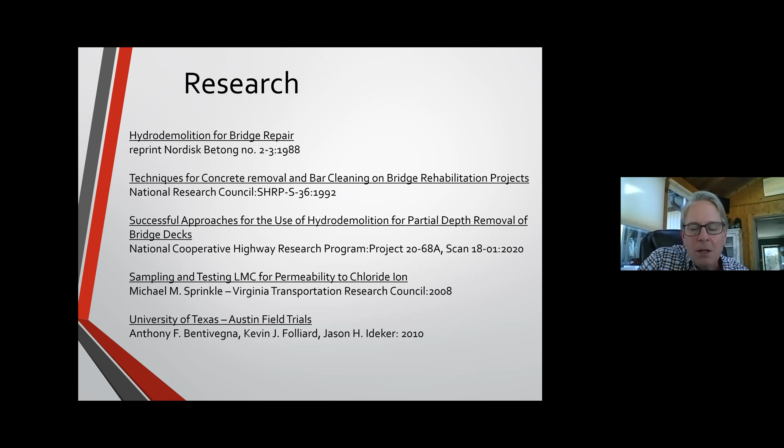One that was kind of fun, the University of Texas did some studies on hydrodemolition and some different types of concrete, fast setting concrete overlays. That was in 2010, and we were involved with that. I had some good pictures from that, so I wanted to end my report showing you some of these cool pictures of students and faculty like yourselves working. Here's their civil engineering building there on the left.

They poured 2 beautiful slabs out in their yard, as you can see, for us to do hydrodemolition on and to test different types of concretes. After we were done, they did stress strain, pull-offs, they did everything. Here's our robot getting off and moving on to the slab, and there we were operating for them. We gave them 2 really nice prepared slabs.

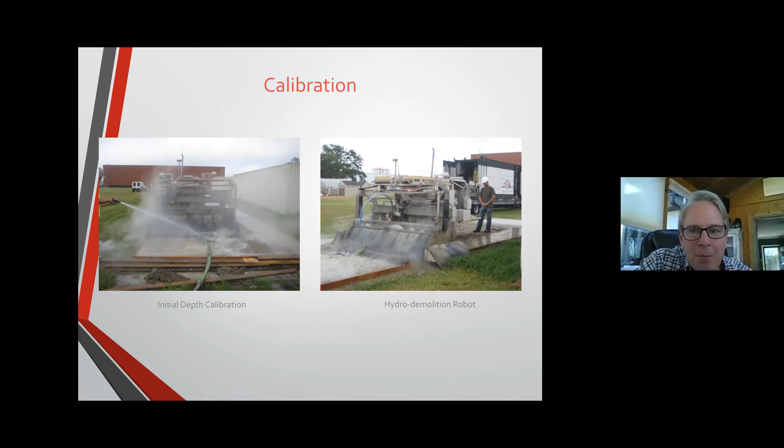We couldn't run our vac truck, so we just cleaned it off the side. Look how nice on the left that picture is, it just gives you that. It was brand new concrete, so you don't get the selective removal, you just get the highly bondable surface.

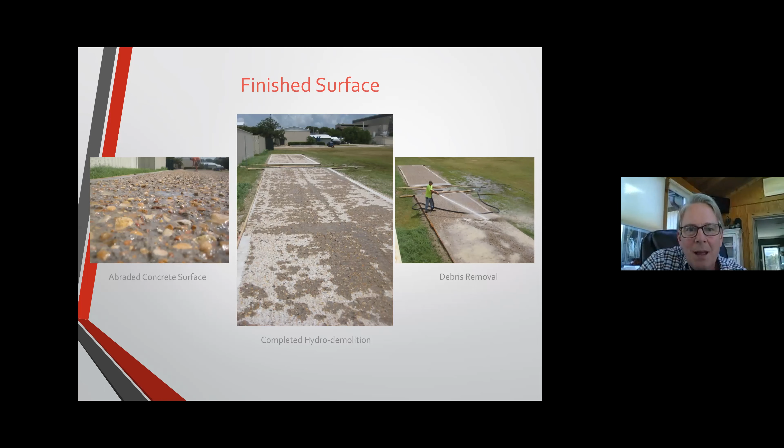And then they built forms around the hydro thing. We brought one of our latex trucks down and poured one of them with the early strength latex. They really liked that, how fast it did. I think they tried a calcium aluminate type mix. The students got in there and did the work, which was really fun, and we had a good time that day.

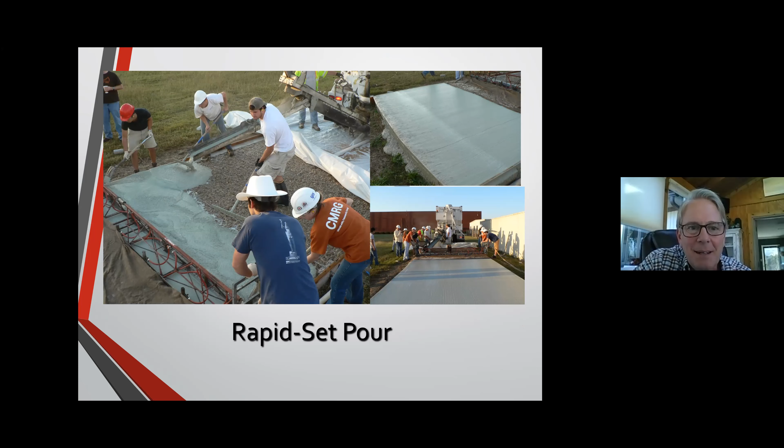They cured it how we told them to with the wet cure and put the plastic over it, which is an evaporation retardant. Then they went and, like I said, did stress strain testing. They tested all the concrete, compressive strength. They used every piece of equipment in the lab that they had.

Well, Ed, I see that Uriah Nichols asked, why do we need to mill for depth first? I've had a contractor tell me they can just hydro-demo the depth that we want and save on the cost of mobilizing a milling machine.

Yes, that's a very good question. On a small bridge, I agree - why bring a milling machine out to do 300 square yards, when the hydro is just going to be there for a day anyway. But as you get to larger bridges, say you get to a 2,000 square yard bridge, if you don't mill, that bridge is going to take 4 days to hydro, which is an additional cost. Whereas if we do mill first, it'll only take 2 days for hydro.

So you have to compare the cost of 2 days of hydro and a day of milling versus 4 days of hydro, and you'll see that the 2 days of hydro with the milling is a lot cheaper, plus the work gets done a lot faster—3 days versus 4. That's just on a 2,000 yard job, and the savings is probably $25,000, maybe more. So if it's a small bridge, I agree with the contractor—we'll just hydro it, it will take a day. Whether we do milling plus a day of hydro or just a day of hydro, it works. But as you get to bigger decks, it's very cost effective and time effective to mill first.